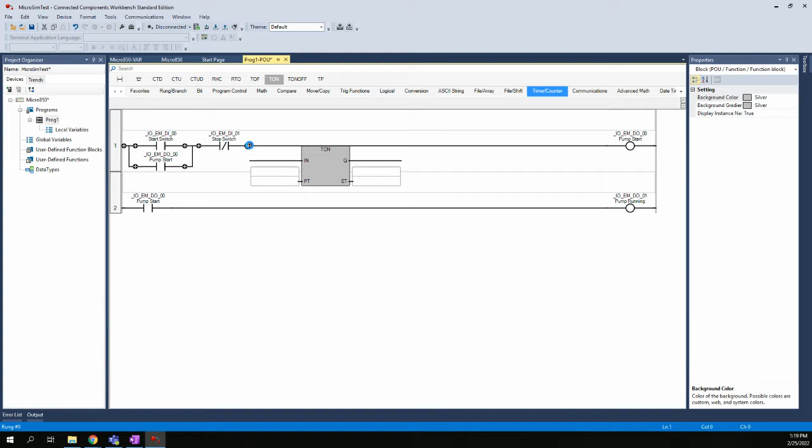So I have a TOF, a TON, and a TONOFF. TOF is the off delay, TON is the on delay, and the TONOFF is the on off delay. So I'm going to click on TON, and when I did that, it dropped it into this first rung. Now the other way I could have done that, if I delete that real quick, is if I would have just held my left mouse down on TON, I could have just dragged it. I could put it wherever I want. For this lab, we're going to put it right behind the stop switch, but of course before the coil.

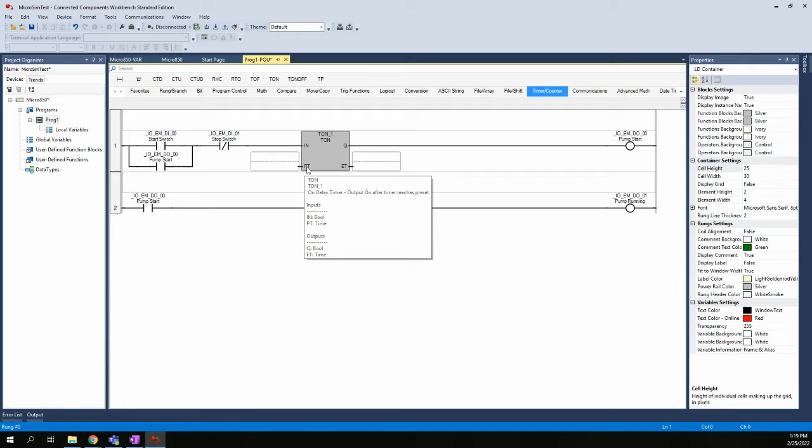So now we have a TON_1 and TON. Now, the ability to configure this timer is actually very simple. We are going to use this PT, and the P stands for preset, and the T stands for timer. So there's a few pins on this block. We have an IN, which of course is whenever this logic here is true, this timer gets energized. All right. And then the Q stands for the output. So that would be the output of the timer, which would basically flow to the next element here on this rung.

So whatever logic we want to start the timer will be brought into the IN pin. Then we have a PT and an ET. The PT stands for preset timer, preset value, and the ET will stand for elapsed time. So this will show you what is the elapsed time of the timer once the timer starts timing.

So in this case, we're going to set it to 10 seconds. So when the timer gets activated, we can watch it count up to 10 seconds using this ET box. We can actually use this in the program too. So if we wanted to display the timer somewhere like on a touch screen, we can read the value of that as a tag, and we can display that and use it somewhere else in the program.

We don't have to program anything in that ET box. It's just going to be a value that timer generates. We do need to set the preset timer because we need to know what is the length of time that we're going to make the timer. We have to tell it that. So the preset, I think, is 10 seconds. So we'll make it a 10-second timer.

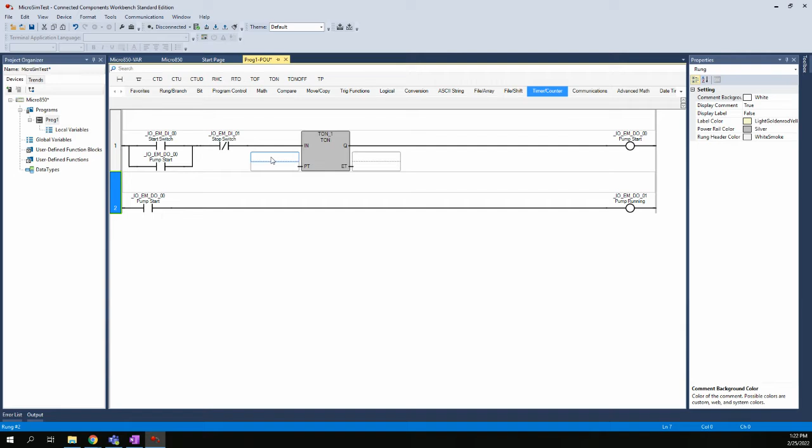So timers for the Micro800, and this would be one of those things too that each PLC manufacturer does timers in a little bit different way. They all work in the same manner, but they do this part of it just slightly different. So for the Micro800, the syntax that you will put in is in this upper box. When I clicked in this upper box, it gave me a kind of a pull down. I could put a tag in here.

I'm going to put a constant, but to make it a timer constant, I'm going to put a T. Then I'm going to put a hashtag or the pound symbol, depending on how you refer to that. And then I'm going to put the value, 10. But the last piece here is I have to put the base. What is the base? So again, I have many options.

I could put an S, and that will make it seconds. If I put an M, that will make it 10 minutes. If I put an H, I believe it'll make it be 10 hours. So we have to specify the base. So all I got to do is put an S, and that will make it a 10-second timer.

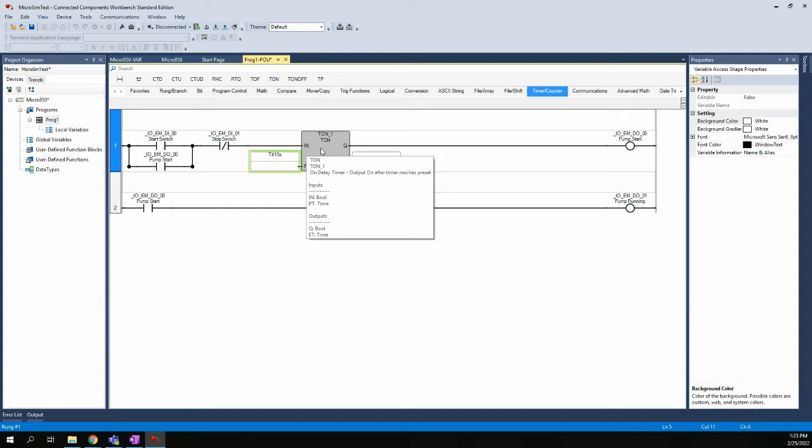I hit enter. When I hit enter, this box is green, and the text is blue, indicating it's a constant, and it just says T#10S. Okay. And again, this box can stay empty. That's it. So what's going to happen now is when I press the start switch, this will start timing for 10 seconds. Once the timer is done, the pump will turn on.

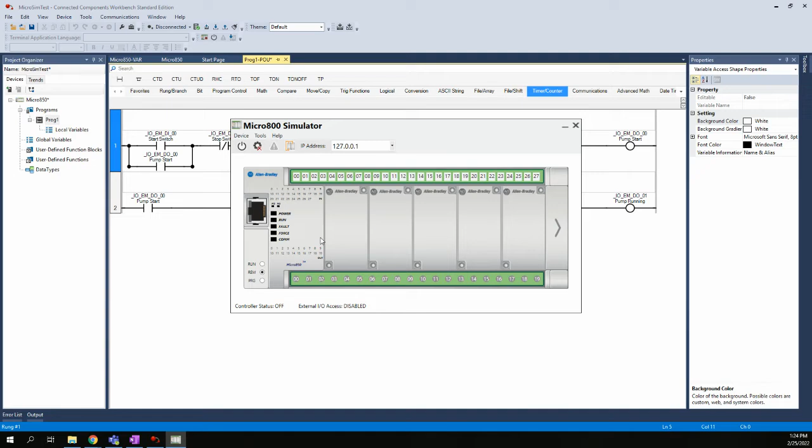So let's actually watch this in action. So again, we're going to use the Micro800 simulator. So to start the simulator, you're going to come up here to Tools, and you're going to choose Micro800 Simulator. And that will open the simulator. Now, back up a second.

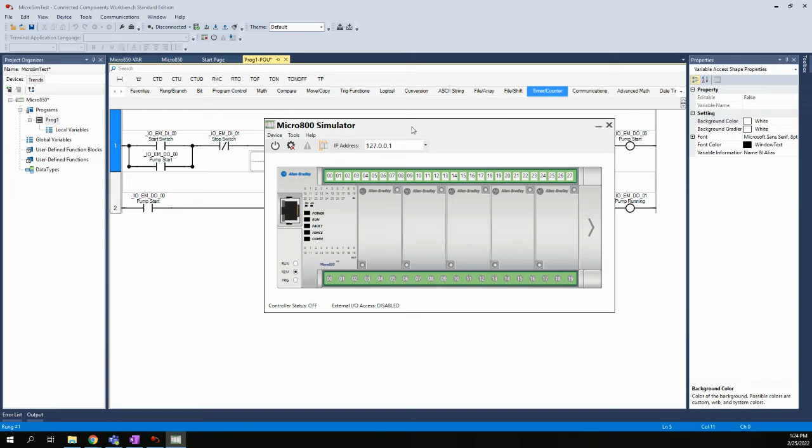If you are going to use a simulator, when we created the project, we had to choose the Micro850 simulator as the device. If you created your logic and you used the Micro820 as your device, then you have to go back and make it the Micro850 simulator. Otherwise, it will not work. You can't download to the simulator if you didn't tell it to be the simulator as part of its configuration.

Now, this brings up the simulator. It looks like a Micro800 PLC. Two things have to happen here before we can actually download. One, verify the IP address. Mine says 127.0.0.1. Yours may be the same, it may not.

But if you hit the pull down, it's important to make sure that it is set to the one that says software loopback interface 1 here. We don't want to be tied to the Ethernet connection or the wireless card. These are my NIC cards that are actually in my laptop. We want to be tied to this software loopback interface. So mine is 127.0.0.1. Yours could be different or it could be the same.

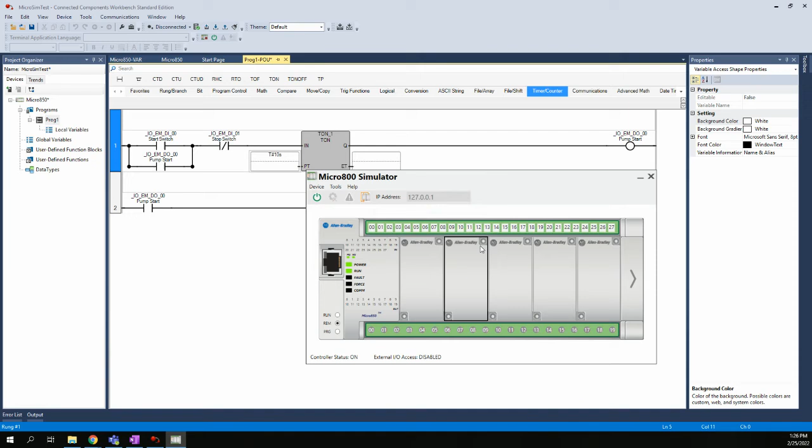And the second step is we actually have to start the simulator. So the on-off button right here, when we first open up the simulator, it is powered off. So we need to power it on. So it just gives us a warning. So it's only going to run for 10 minutes, which is one of the limitations of the free version of the software.

So we know that it's running now because this turned green, and I have a power light on my PLC, and I got something blinking here, and I actually do have my run light on because I had a program in the simulator already. Okay, so we got this set. So now it's time to download.

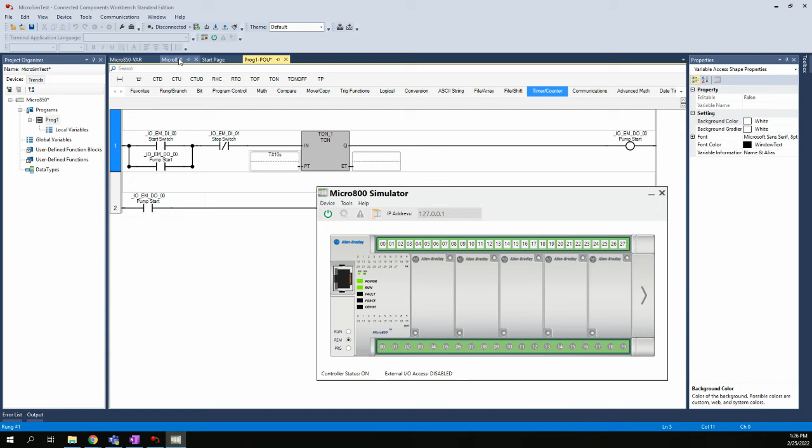So just to show you that when I came back to my Micro800 simulator page, I had a connect button here, but I already had my path set. So if you had not, I'm going to clear the path out, and I'm going to hit connect. So I want to show you how to set the path to the simulator if you haven't done it before.

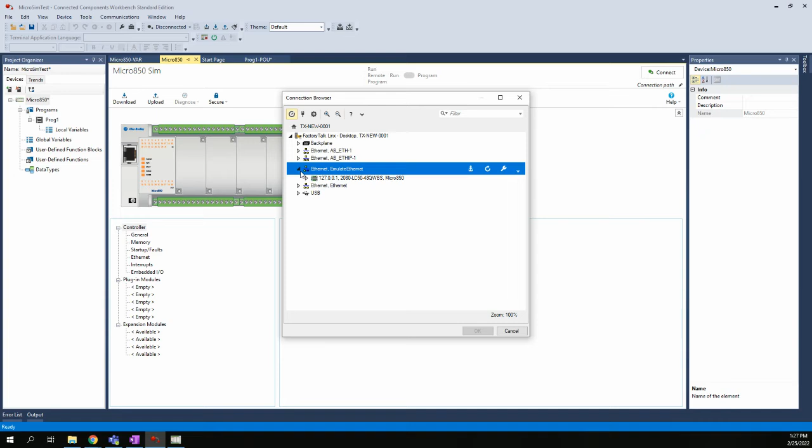So when I hit connect, it pulls up this RSLinx tree, and you see I have a bunch of options here, but one of the options is emulate Ethernet, and I'm going to just expand the triangle there, and now it shows 127.0.0.1, and it says it's a 2080 LC50, and it's a Micro800. That happens to match what I set it to on the emulator before I started it.

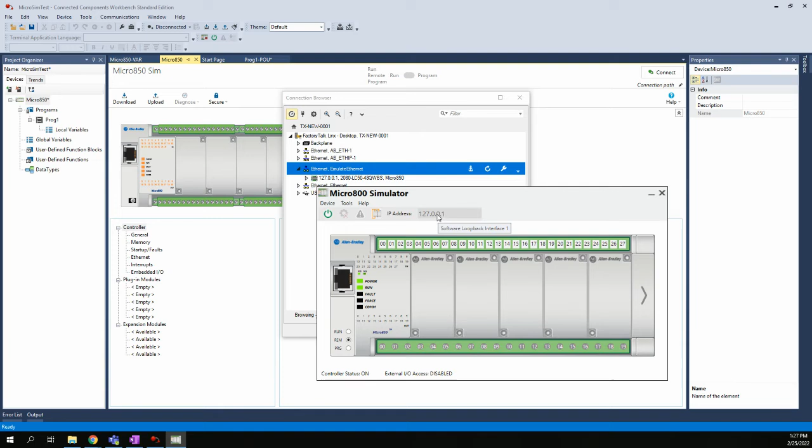I should note that once I started the simulator, I cannot go back and change this IP address. So if you didn't set this right, you have to stop the simulator. You might have to actually power down completely, bring it back up, and then you can change your IP address. So I'm going to choose that as my path. I'm going to hit OK.

So at the moment, it is actually connecting to the simulator, and it will pop up a window in a second and ask me, do I want to download? Do you want to download the current project? I'm going to say yes. It's going to probably prompt me one more time in just a moment. Yep, do you want to download? I'm going to say yes.

Notice that down here, there's a little running scroll of what's going on. If there's any kind of errors or faults or syntax errors, I'll get that right. So 1 succeeded, 0 failed. So any errors would pop up down here in this output window, they call it.

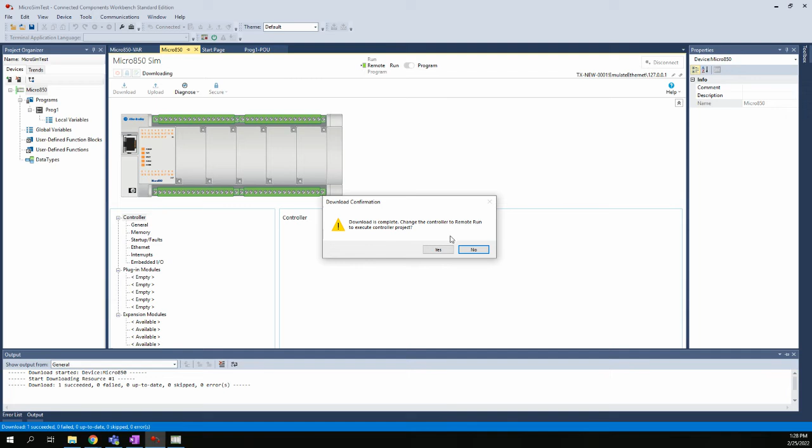And then the next pop-up says, hey, download is complete. Do you want to change it back to remote run state? And I'm going to say yes, because that will now put it back into run mode. And it just says you can only run for 10 minutes, basically, and that's fine. That's plenty of time for us to do what we need to do.

So I'll pull the simulator back up. You'll see that I am powered and I am running. And here's the logic now. So I am connected. Again, because the background is now yellow, that indicates that I'm actually connected. It does say that I'm connected here, so that way we know that we are connected to the controller.

You can see that also my stop switch is showing as red. You can see that this is in red too. So this is the elapsed time, which will show in red. And the fact that it's red means that it's a live number, and it's going to actually update on the screen with live data.

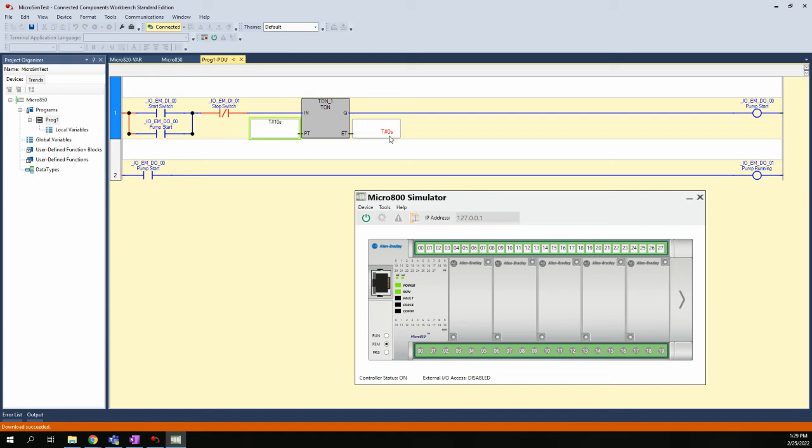So let's test out our circuit, right? So again, when I press the start switch, I'm going to delay 10 seconds before I turn the pump on. Now in this case, I'm going to select the start switch and keep it on. So I'm going to show you why here in a second.

So I activate the start switch. That brought power to the timer. The timer is now counting. So you see we're at 5, 6, 7, 8, 9, 10. And then after 10 seconds, that came on.

And of course, when that energized, so did my pump running light. Okay. Now I'm going to turn that off. So if I turn off the input, I still keep the timer up and the output on because I have my latch circuit going. And next step is I'm going to hit the stop switch and basically reset the timer. So when I do that, the timer gets reset.

Now I want to show you what happens, and I want you to experiment with this too. When I press the start switch, if I turn off the start switch, look what happens. The timer goes back to 0. Okay, so the timer will basically clear. If it doesn't make it all the way to 10 seconds, if this condition goes back to false or off, the timer goes back to 0. We have to start the timer all over again.

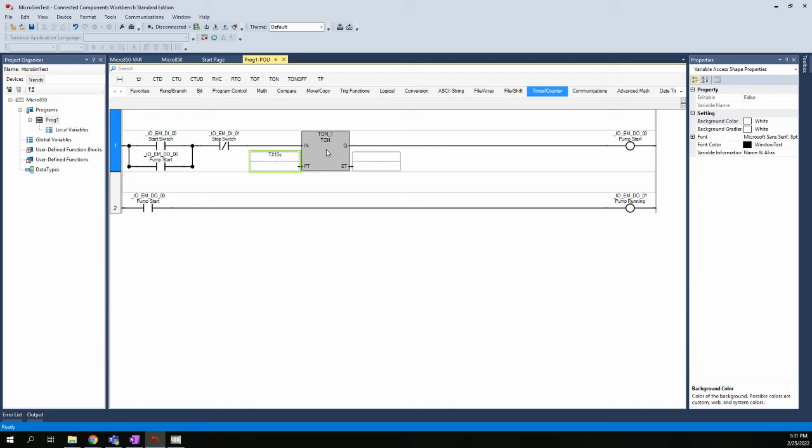The exercise here is to try the 3 different timers and see how they work. So this is the on delay. We will use an off delay. So I can cut this out and put the off delay right here in its place. The off delay looks exactly the same as the on delay. We will put a T#10S as well to make it a 10-second timer.

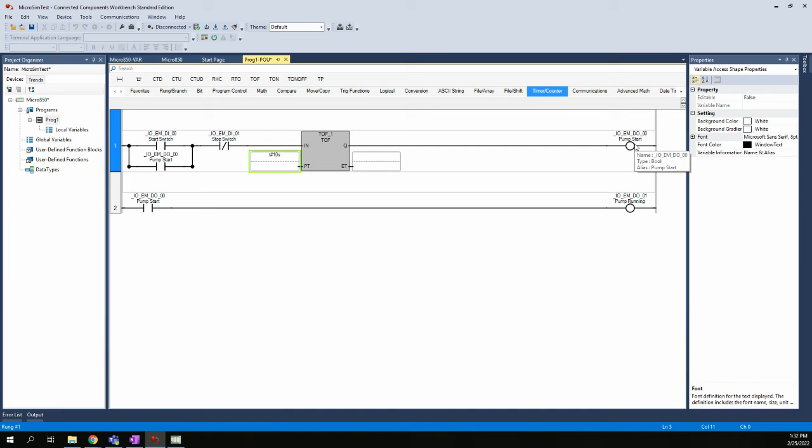But the difference now is that when I press the start switch, the pump will immediately turn on. But when I press the stop switch, it will delay 10 seconds before it turns off. And I'll go ahead and show that to you real quick. This will take a moment to reconnect. I have to download again.

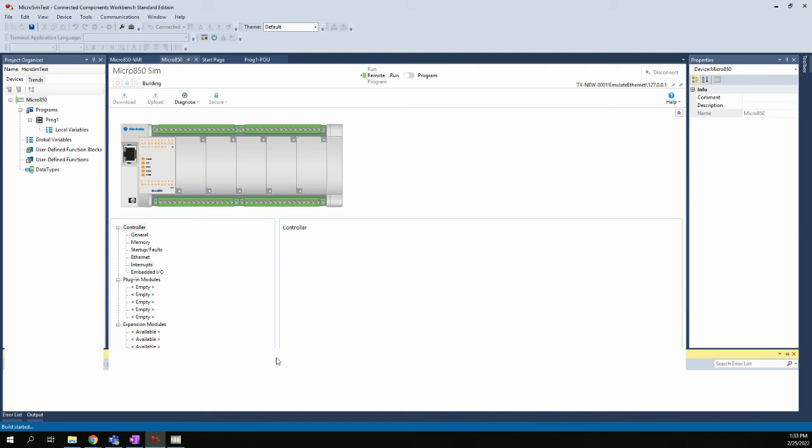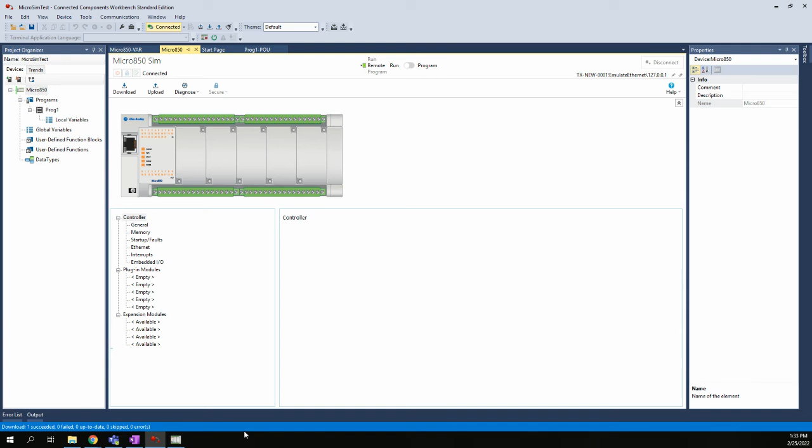So we'll choose to download to the controller. It'll ask me once again, do you want to download? And I'll say yes. And after the download's done, it will prompt me one more time. Do you want to put it back in run mode? And I'll say yes. It'll run for 10 minutes. So we'll pull up our simulator screen, and in just a moment, it'll pull up the logic.

All right. So now we're connected again. We have our logic showing. I'm going to hit the start switch. Now, just like I said, the pump turned on immediately. Now, when I press the stop switch, this will make this part false. That'll make the timer turn off essentially. And then we will start counting 10 seconds. But this output here will remain on until this timer is done.

So let's just watch that in action. So we're counting 4, 5, 6, 7, 8, 9, 10, and there it went. So after 10 seconds, it turned off. Now let's look at the same condition like we tested before. So I turn on the pump,

and what happens now if I press the stop, but then I take my finger back off? So the timer actually stopped and it reset itself, but the output is still on. So just like the on delay timer, it resets itself if you change its state midway through. This off delay does the exact same thing. So to turn this pump off, this thing has to stay off for the full 10 seconds.